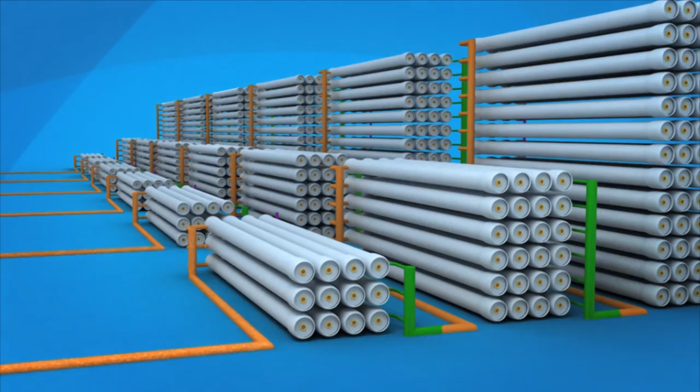The St Mary's Water Recycling Plant uses reverse osmosis to further treat wastewater after the ultrafiltration process.

Reverse osmosis membranes are constructed from a membrane flat sheet. It is comprised of 3 layers: a polyester fabric support base, a microporous polysulfone layer, and a 0.2 micron thick polyamide barrier layer. The polysulfone layer strengthens the very thin barrier layer. It is the barrier layer that removes nutrients, chemicals, bacteria, and viruses from the water.

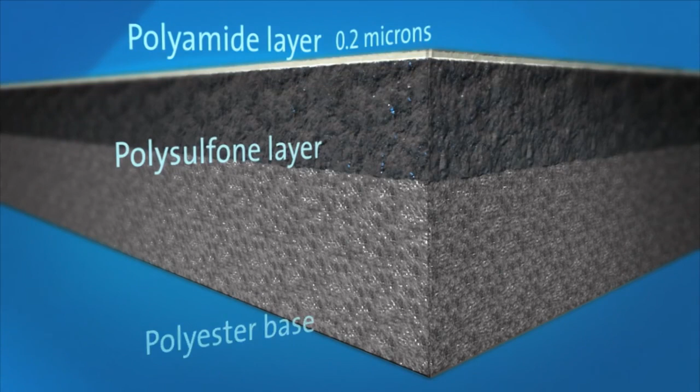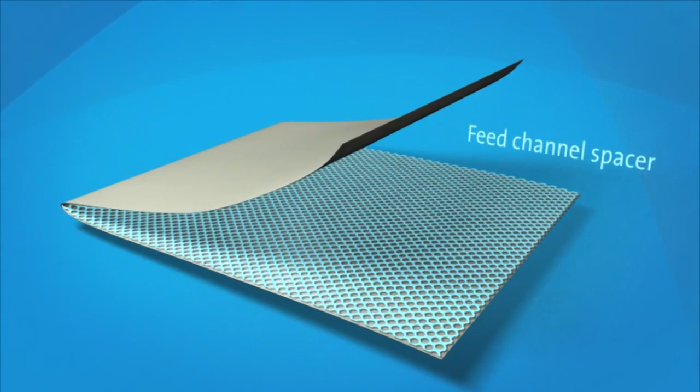The membrane flat sheet is combined with a sheet of feed channel spacer. This provides turbulence and creates space between the membrane sheets for the feed water.

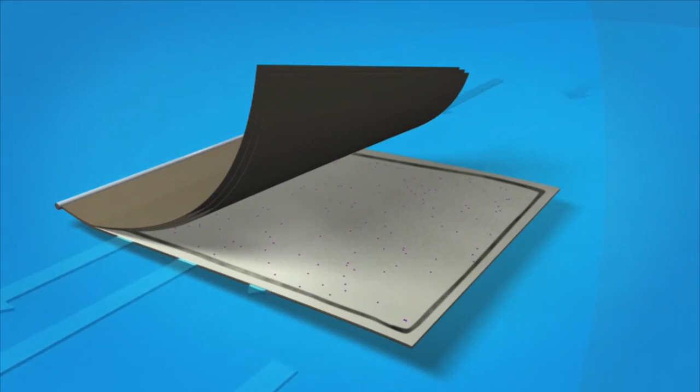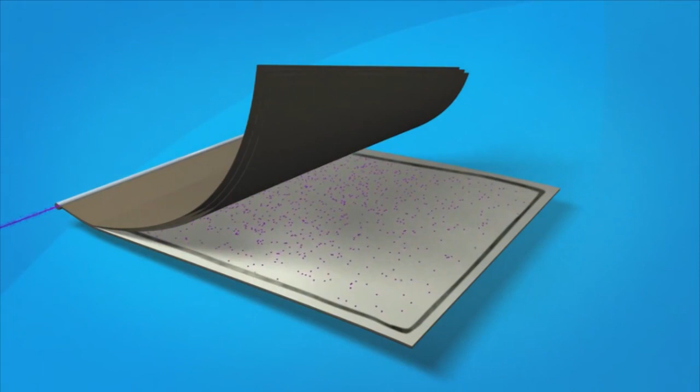A sheet of permeate spacer is added to the membrane sheets and feed channel spacer. This enables the final recycled water product, or permeate, to flow evenly across the entire membrane surface, even under high pressure. The back of the membrane is completely sealed to the edges of the permeate spacer. The membrane sheets are glued along each of the 3 exposed sides and rolled around the core tube.

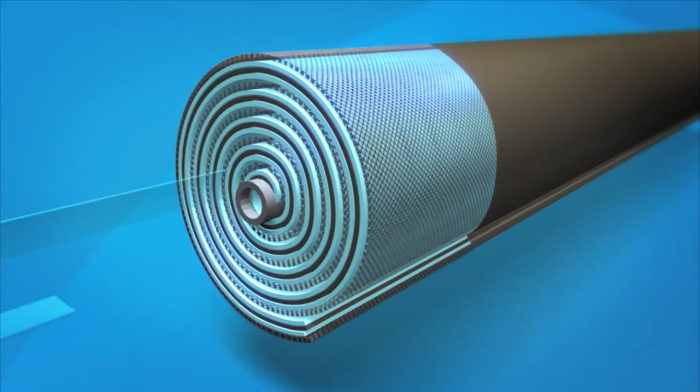Feed water is forced through the feed channel spacer and into the barrier layer of the membrane. Water passes through the membrane surface into the permeate channel. It flows in a spiral direction and collects in the core tube. This water is the final recycled water product, or permeate.

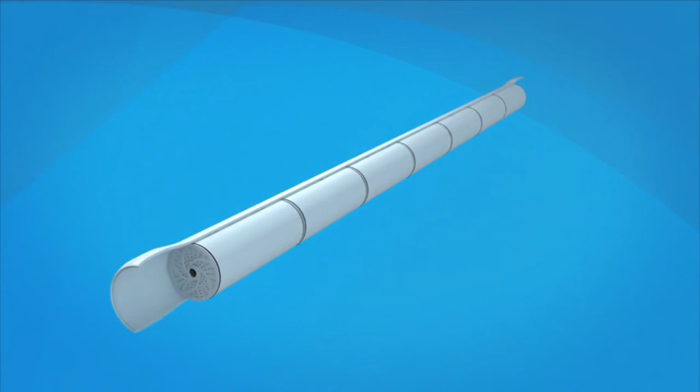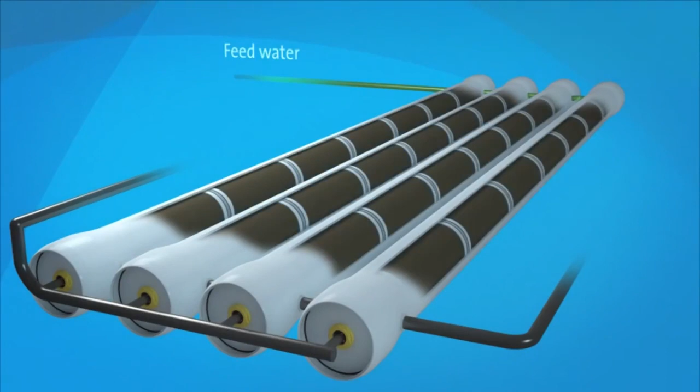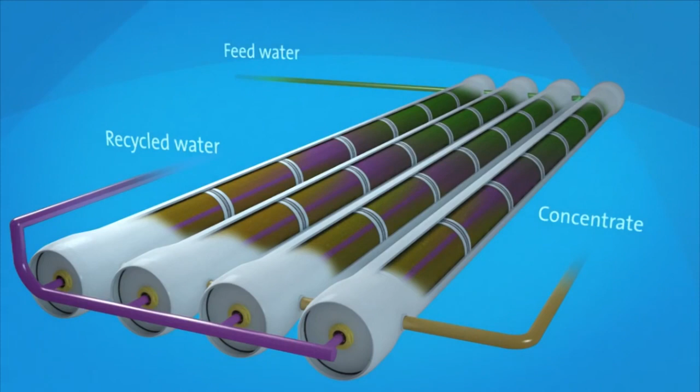There are 7 spiral wound elements loaded in one pressure vessel. Once the end adapter is connected to the last element and the pressure vessel is sealed, feed water can be introduced. Feed water is pumped at high pressure into the vessel. As it travels, small molecules like water pass through the membrane, while larger particles such as salt, bacteria, and viruses do not. The final recycled water product is collected from the end of the elements. The concentrate or reject from that vessel flows to another stage, producing more recycled water.

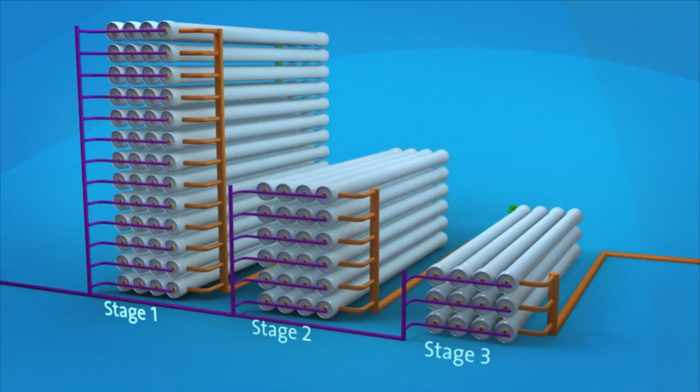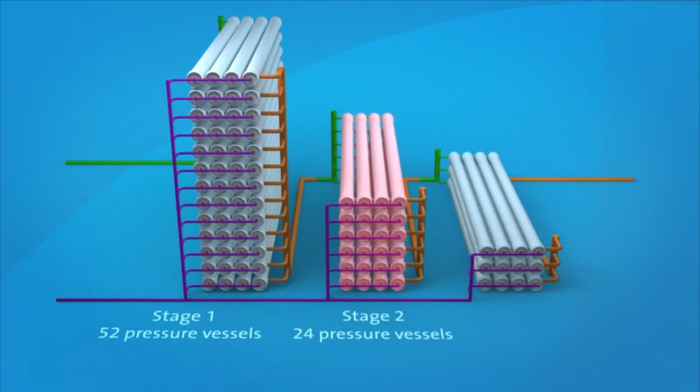At St Mary's, there are 6 reverse osmosis treatment trains, each with 3 stages. This design produces the highest amount of recycled water with reduced concentrate waste. Stage 1 has 52 pressure vessels, Stage 2 has 24 pressure vessels, and Stage 3 has 12 pressure vessels. 58 million litres of feed water enters the reverse osmosis system on a daily basis.

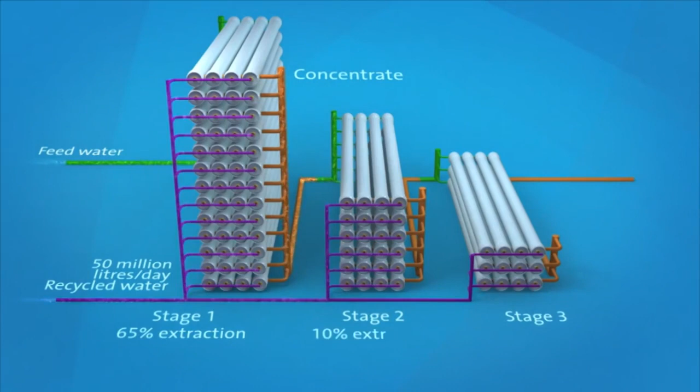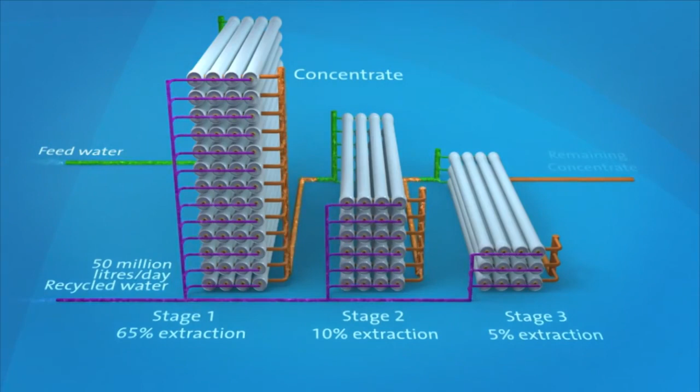As the feed water passes through each stage, more recycled water is extracted. 65% of recycled water is extracted at Stage 1. The remaining 35% is passed through Stage 2, where a further 10% is extracted. The final 25% is passed through Stage 3, where the last 5% of recycled water is extracted. 80% of all feed water is recovered as recycled water. An average of 50 million litres of recycled water is produced every day at St Mary's.

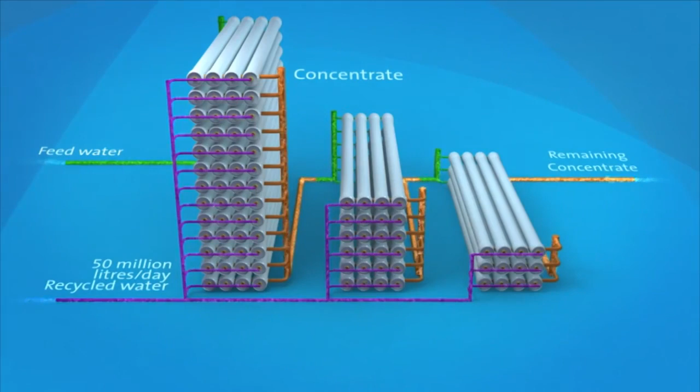The remaining concentrate contains so much salt and impurities that to recycle it would not make economic sense. This concentrate stream of 8 million litres a day is sent to North Head Wastewater Treatment Plant, where it is treated and released into the ocean.